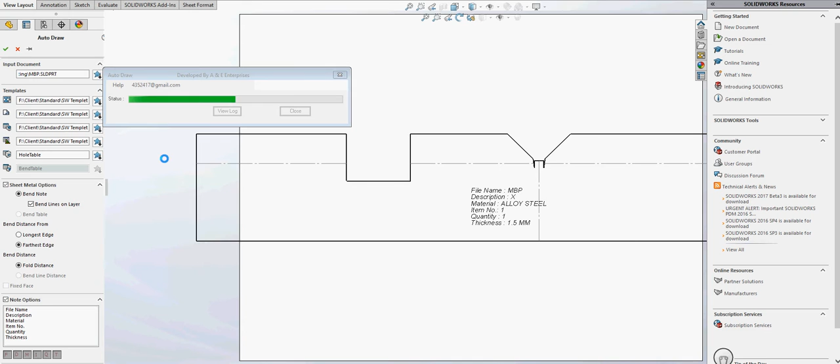Now it starts placing the views automatically for the multi-body part. It will one by one take the body, flatten that body, and place the view. While placing the view, it also scales the view so that it doesn't overlap the border or the cut list. It takes care of that.

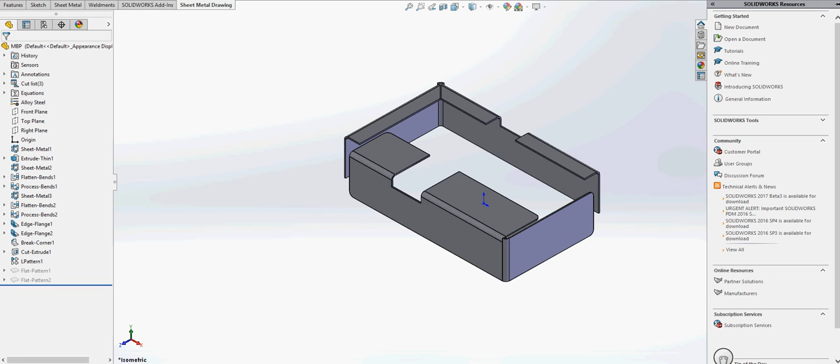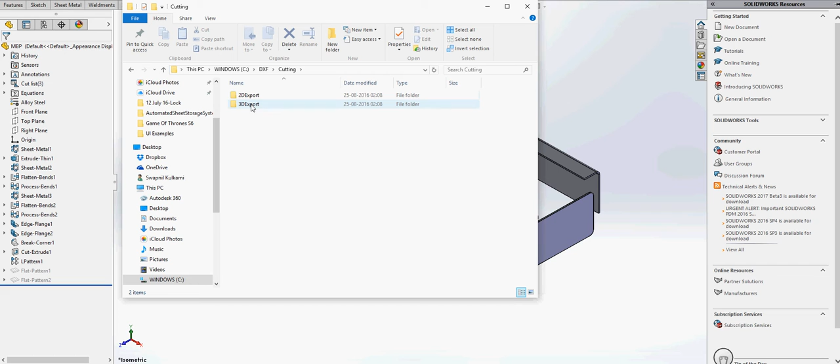The bending one has got bending drawings in it, that is this drawing. And the cutting folder has got again two folders, one a 2D export and the other a 3D export. Both are optional. 2D export will give you the DXF files, which are 1:1 scale.

So for example, if I open this part here, you can see that this is a DXF file which has come at 1:1 scale with these notes which have come automatically in it, and it also gives me a SAT file. These are the SAT files.

If it is a multi-body part which has got many bodies in it, saving each individual body as a SAT file is a pain. So this functionality also does that. In a way, it creates cutting and bending drawings for sheet metal components. Now I'm going to open the drawing which was recently created.

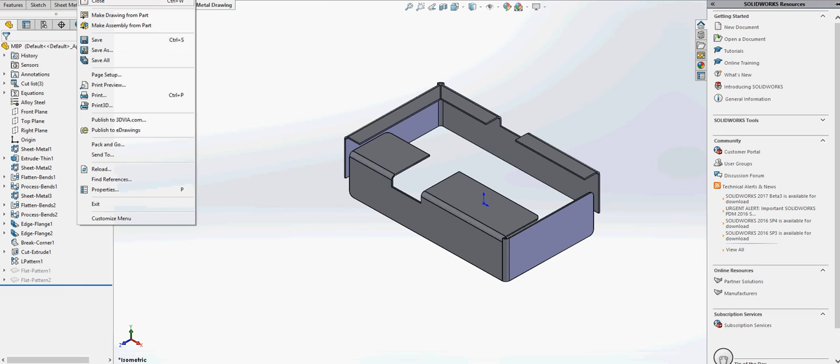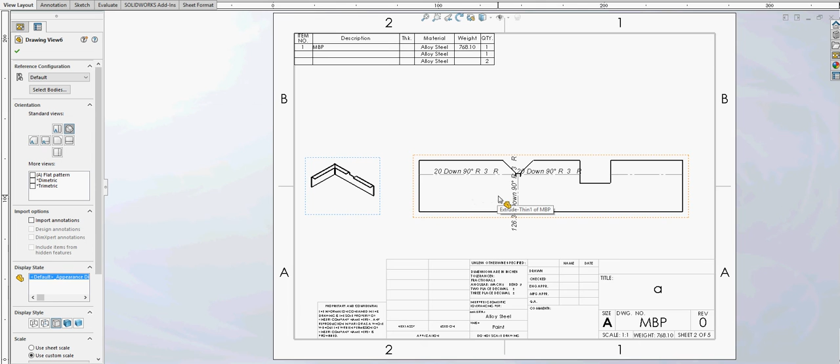If you look at this file here, the first sheet will show you 4 views, which are just placed for the sake of getting the cut list. This has got X and Y, two bodies in it. Now if I go to the bending sheet, it has put one isometric view and one flat pattern view. It also gives you the dimensions.

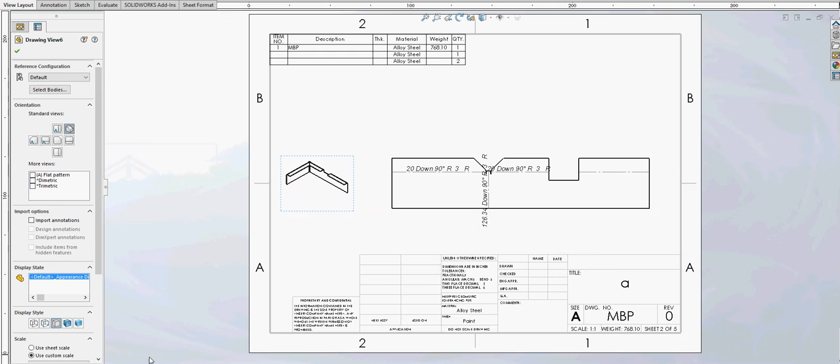This is like 20 millimeters down, 90 degrees, and whatever the R is. This 20 mm is the dimension after folding it. So you don't have to create the conventional drawing for this, and it does that for all the bodies or all the parts of an assembly. If I run the same functionality on an assembly, it works for that as well.

It creates two sheets for each part or each body: 1_B and 1_C. B stands for bending, C stands for cutting. The cutting view which is placed is always at 1:1 scale, with all the information which is very much required for the person who is going to do the laser cutting.